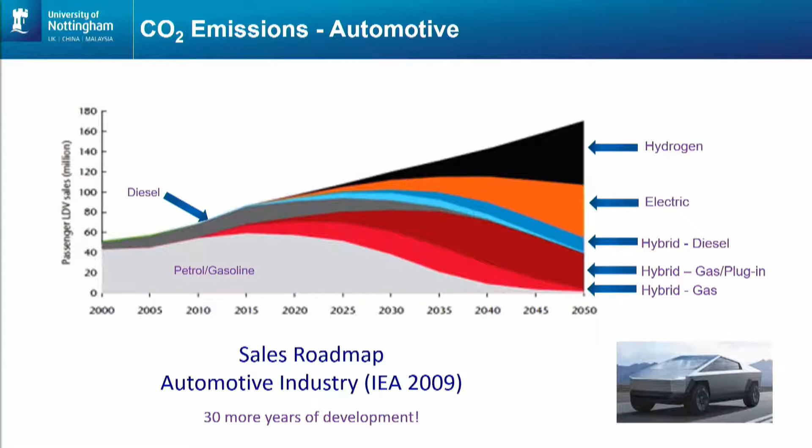They'll be replaced with things electrically driven, either as hybrids or all-electric. One thing I find fascinating about this roadmap is there's not one or two solutions as we have today — there's an energy mix, including hydrogen, but electric propulsion and all-electric propulsion will take over half of the market. I think that's important. I don't just work in automotive, I also do a lot of work in aerospace.

And they have a similar problem in trying to bring down the emissions from aviation, particularly in terms of CO2.

And they have some advantages. They can control the operations, the infrastructure, and so on. The big problem in the aviation industry is the time of investment. The aircraft going into service now will still be flying in 25, 30 years' time. And so some of this will already happen because the investment has already gone in.

So if we don't take any action, then we're going to be at twice the year 2000 levels by 2050. Obviously not acceptable. The target by 2050 in aviation is to get to half the CO2 emissions that we had 20 years ago.

We can argue whether that's enough or whether we should be going further. But the investment period in aviation is so long, it does take time to have these impacts. And the other thing to note is that some of this is known technology - we've already done this work. But over half of these gains are in new technologies and new ways ahead.

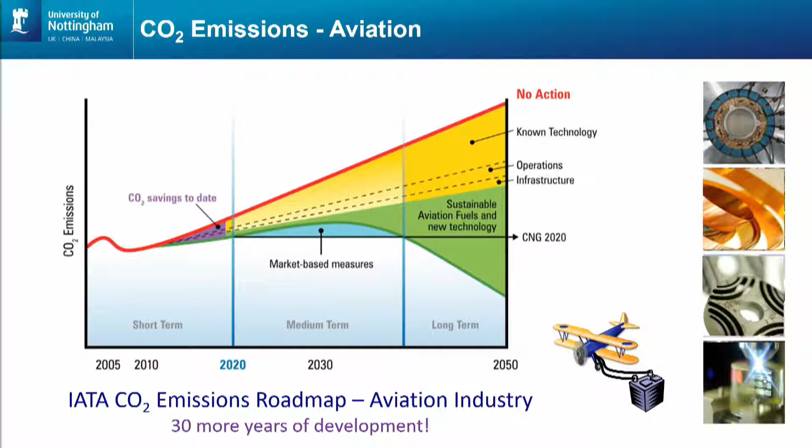So that's a quick look into the future and where a couple of industries think we might be going, and the time it takes them to get there. It's also worth looking back in the past.

We've heard a lot today about electric cars and the technologies that are available today. One thing that's worth remembering is this is not a new idea. The oldest electric car I can find relates back to 1828, almost 200 years ago. So the first cars were electric, and the peak of production was back in 1912, over 100 years ago.

So actually, the concept of the car came from the electric car, not from the internal combustion engine. The problem we find though is that by the time we got to 1928, 100 years after the first recorded electric vehicle, all production of electric vehicles had ended.

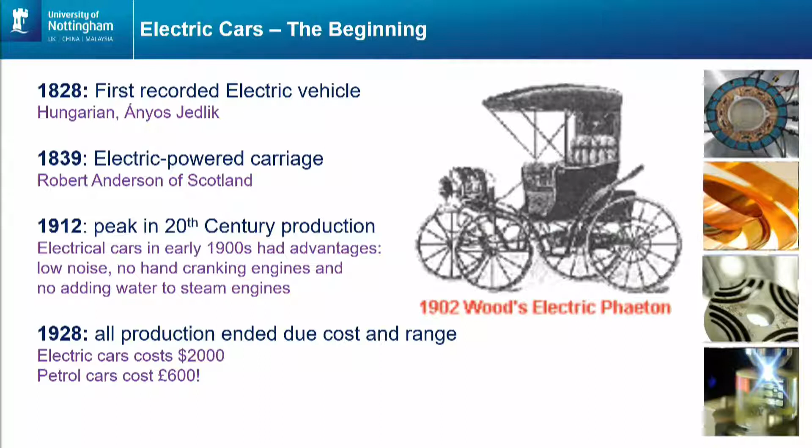And it ended for two reasons. Electric cars were more expensive and people were concerned about the range of the electric vehicle. Unfortunately, those two things are things that we've still not solved as engineers and scientists. We're still working on reducing the cost. We're still working on increasing the range of electric vehicles. We're getting there, but we still have those fundamental problems.

It's interesting to reflect on what would have happened, what would happen today, if 100 years ago engineers had solved those two problems and electric vehicles had become the cars that we know and love over the last 100 years. That decision, those market-driven influences back in the early 1920s really did have a massive impact on the world, and something that we've now got to change.

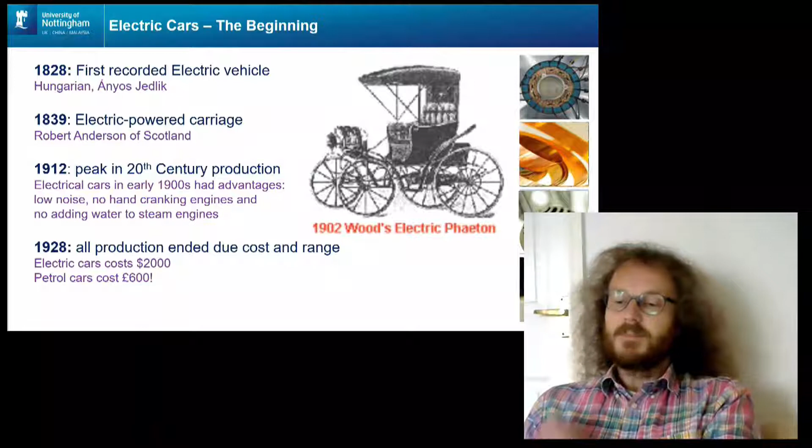So what have we been doing? Well, at Nottingham, we do a lot of development of technology. We work with a lot of different industrial partners, but we also like to demonstrate what we do and to make it exciting and accessible.

So I could talk about lots of research projects, lots of work that we do there. What I prefer to talk about is the electric superbike. It's a demonstration of the technology, but also a demonstration of advocacy of electric vehicles.

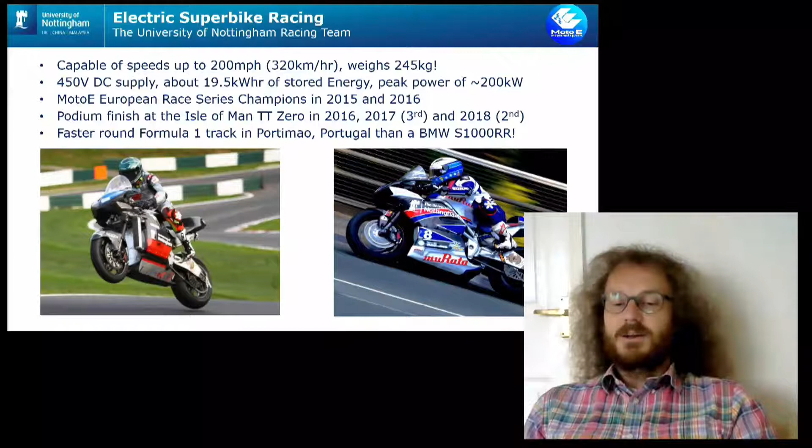So just to give you some ideas about this bike, it's capable of speeds up to 200 miles an hour. It has a peak power at the back wheel of about 200 kilowatts, so rather a lot more than your average car. It has about 19.5 kilowatt hours of stored energy, and it's faster around a Formula One track than a BMW Superbike.

So this is not a slow vehicle. This is a fast vehicle. It's for racing, and it's been designed purely for racing. Why are we doing that?

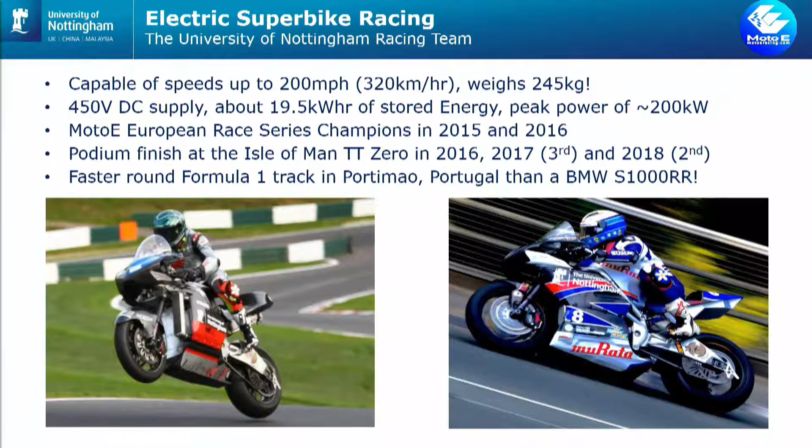Well, the first reason we're doing this is because motorsport is a great way of making technology exciting and of raising awareness of that technology. The TV and media coverage that we get from the bike has been fantastic, both for my university, but also to demonstrate how things can move forward.

Race bikes can also be used to trial and test new technologies. This bike has a lot of technologies on it that have been developed, for example, for aerospace applications. We need things that are small, light and powerful on this bike. And so it's taking those technologies that have been developed in research projects and putting them in a very testing, very harsh environment.

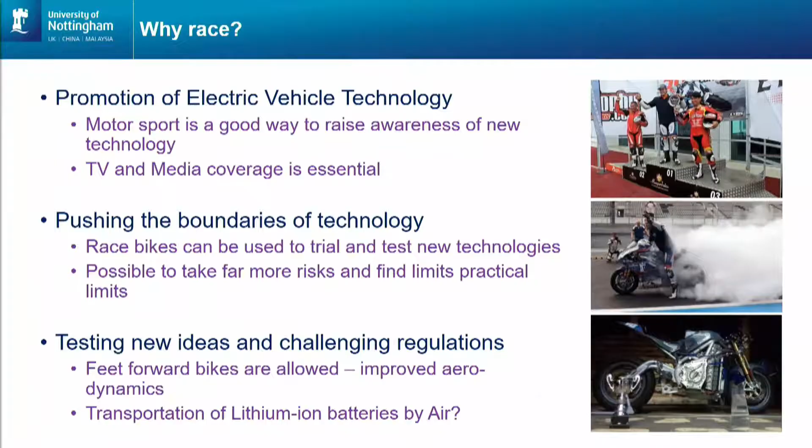When you race a motorbike, you tend to drive that motorbike to its very limits, something you tend not to do with your family car too often. So it really does allow us to take more technological risks and find the practical limits, find out what fails.

If you're racing and something fails on a bike or a car, you put it down to experience and you learn from it. It's a little bit different when you're producing millions of cars. You don't want to find those practical limits in that environment. And we're also testing and challenging new ideas.

One of our favorite races, and where this bike was designed to operate, was at the Isle of Man. Just a bit of geography: the Isle of Man is a small island between England and Northern Ireland. It sits out in the Irish Sea. It looks like it's part of the United Kingdom, but in fact it's a self-governing island. It has its own government, its own laws, and its own rules.

Every year for two weeks, they close the main roads on the island and we race motorbikes around it. This has happened for over 100 years. The route is 38 miles, about 60 kilometers long, on small country roads. It is not a normal racetrack. This is what every motorbike owner dreams of doing: testing their machine on real roads, past houses, over hills, and really racing in an environment that you would normally ride in.

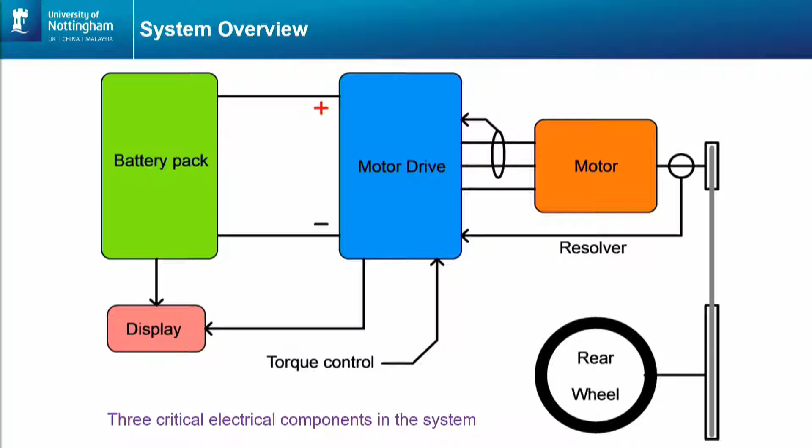If it's all electric, that would be a battery pack, exactly what we have on the motorbike. We have some power electronics - the thing that I'm professor of, that's the blue box on the screen - and we have an electric motor, the orange square on that screen. In the electric motorbike, there's no gearbox - it's a direct drive from the motor to the rear wheel, single speed sprocket.

As the previous speaker was saying, electric vehicles are really torquey. You get instant acceleration - the controller responds in microseconds to any demand. So that motor is very torquey and very capable of accelerating the bike without the use of a gearbox. No wasted time changing gears or anything like that. The bike will accelerate quite rapidly without that.

So these are the elements we're talking about. To do this and enable electric vehicles to happen - to increase the performance, increase the range, increase the efficiency - we need to look at these elements: the battery, the energy storage, the motor drive, the power converter, and the electrical machine itself, and get the performance of these that we need.

This is great in racing because we're being pushed by our competitors all the time, but it's those technological developments that then go into everyday electric vehicles, maybe scaled down a bit, maybe in larger vehicles. The sorts of powers we're talking about here might be what you'd need in a truck on a normal road. So a great way to demonstrate that technology and get the efficiencies up, get the range up, and so on.

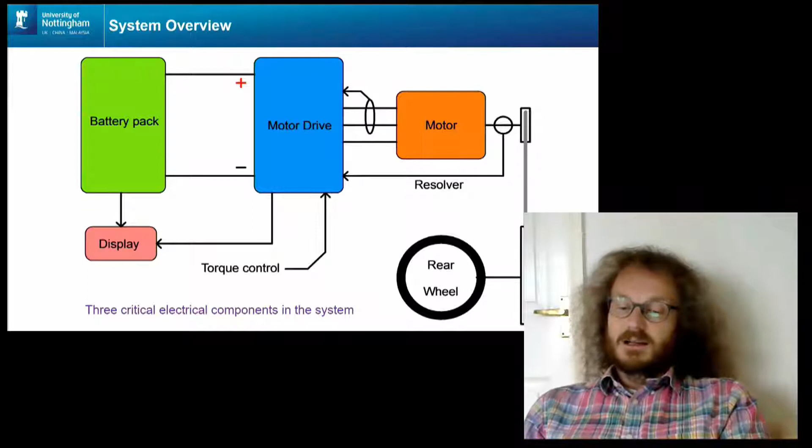So when we're looking at this, we've done a lot of work on the electrical motors themselves - how to make those smaller, lighter, how to use new technologies coming along in terms of integration, magnetic components, all the great things that professors like to spend a lot of time working on, and where we do a lot of our research to try and improve these machines.

Now, what you can't do for an electric vehicle is go and buy an off-the-shelf motor that's been designed for a different application and use that in the electric vehicle application. What you need to do is design and build your electrical motor around the use cases that vehicle would expect to see.

In the electric superbike, this is really easy. We know how a number of riders will ride our bike around that track, around the Isle of Man TT course. We know that's how they're going to ride the bike, we know what the duty cycles look like, we know exactly what that use case is all about. So we can define that really well and optimize the electrical machine just for that race. Now, that's a little bit harder when it comes to cars for everybody else, or trucks.

There's a range of use cases. We don't all use cars in the same way. A taxi is driven in different duty cycles to, say, somebody who uses their car to tow trailers and drive across the country. But we can take those ranges and optimize the electrical machines and the drives around that.

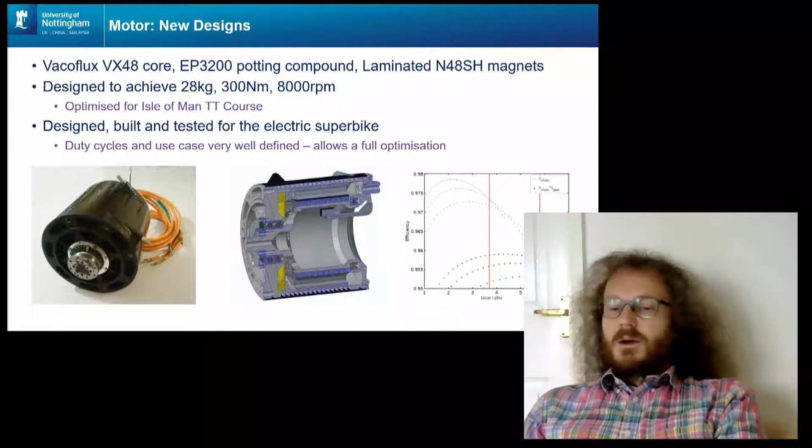We need to be able to control that electrical motor, and this is the big step forward that they didn't have in the 1920s. So when they first had electrical cars, they didn't have controllers to control the electrical motors using power electronics in the way we do today.

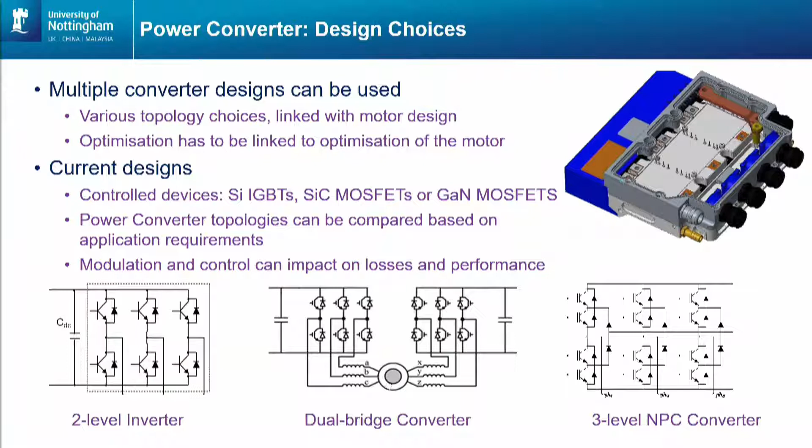There isn't just one design of power electronic converter you would use in this application. There's lots of different designs, lots of different topologies of those power electronic converters, lots of different materials that are emerging that we can use for the switching devices we need in those power converters. And they have some great advantages that we can use.

So here is just showing the efficiency gains that we're having by going from silicon-based switching devices to silicon carbide-based switching devices. Devices that were just not available 10 years ago, but now are allowing us to get massive increases in the efficiency. Why is that important?

Well, that reduces the losses in the vehicle, so you don't have to take quite so much energy from the grid. You can drive your vehicle a little bit further for every full charge of battery that you put in there. So all those things work really well and are pushing towards removing the problems of range, reducing the problems of how long it takes to charge the vehicle, reducing the weight of the vehicle.

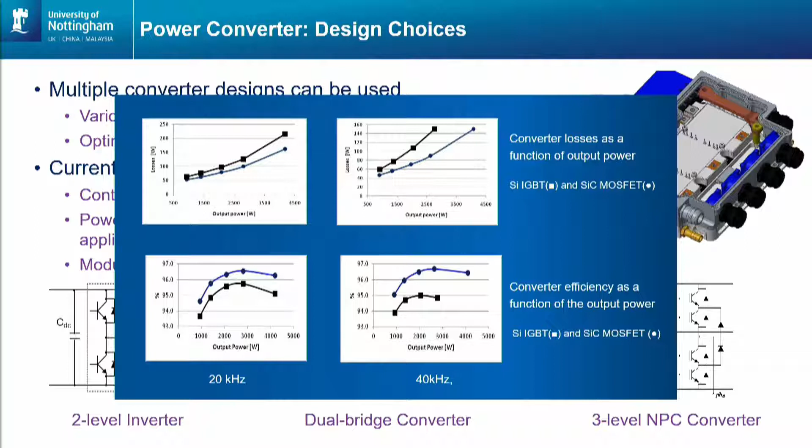And the amount of energy you waste in driving. So a good example there of where at the very small level, these devices are only 2 or 3 millimeters square, but where that technology in the switching devices is helping us to develop the power electronic converters we need to enable more practical electric vehicles. All very important in terms of moving forward.

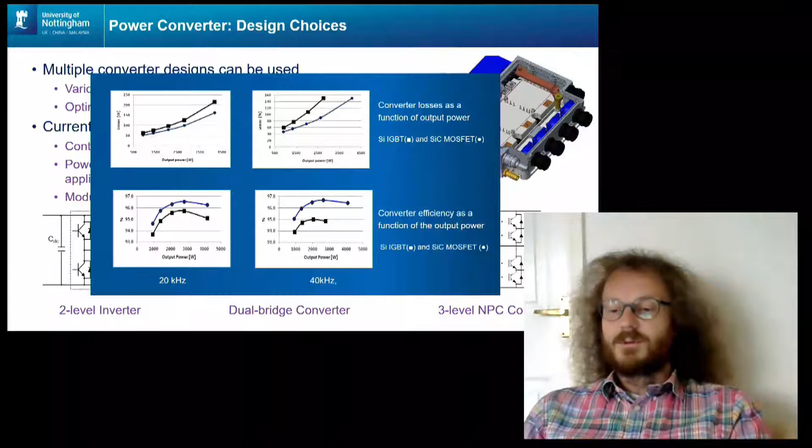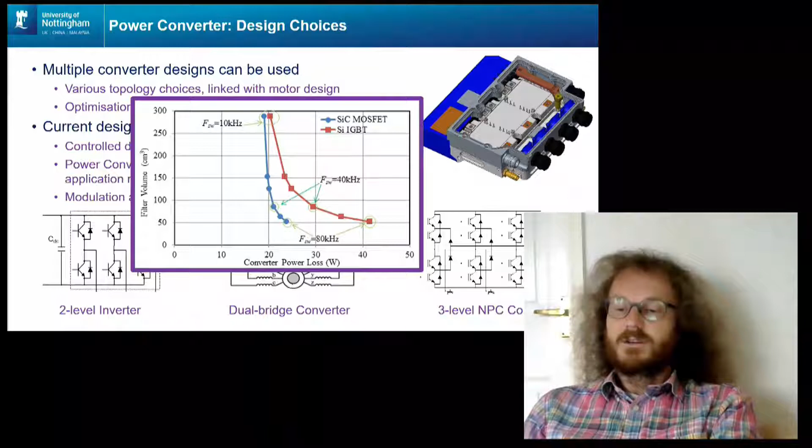So that's the electrical machine and the power electronics. The other problem we have is with energy storage.

Gasoline, petrol, or diesel are both very good in terms of the weight and volume to the amount of energy you have. And they also, in a vehicle, have the interesting effect of reducing the weight of the vehicle as you drive. With a battery, the battery stays almost exactly the same weight for the entire journey. It doesn't matter about its state of charge. The battery will always weigh the same.

This is interesting for the motorbike because it means the dynamics of the motorbike are constant throughout a race, something our rider noticed quite quickly.

What we're waiting for here, I guess, is that at the moment we are reliant on lithium-based batteries. They give us the best volumetric and gravimetric energy densities, so they give us the lightest, smallest solutions we can use today. If you look at the history of rechargeable batteries, we find the chemistry keeps changing.

We still have lead acid batteries in our cars for the 12 or 24 volt systems that run the auxiliaries on our everyday cars today. But it's quite an old technology, and most of us will probably remember going through NiCad batteries, nickel metal hydride rechargeable batteries, and then the lithium-based technology came along.

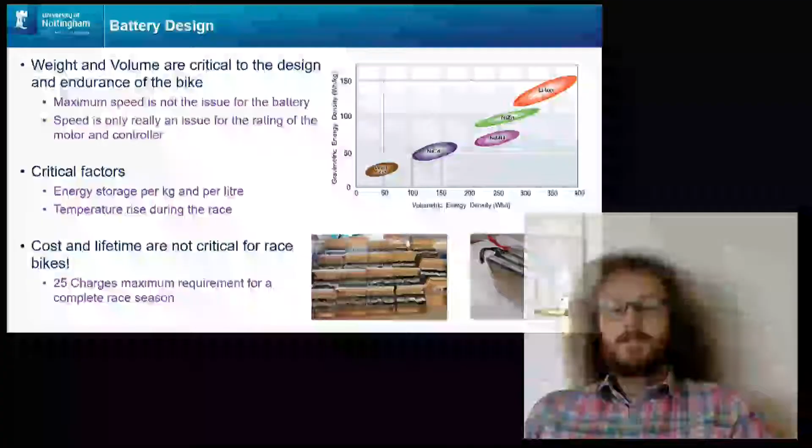You'll be plugging in your telephone once a week to charge it rather than once a day. And the whole problem with the range of electric vehicles will go away, because the weight and the size of the battery we need will be at the point where it's no longer something that's an issue. So that'll be great to see, that battery getting smaller, that battery getting lighter.

It's practical today. The previous speaker was mentioning the Rivian trucks with a range of 500 miles.

I don't know about anybody else, but I need a cup of tea or coffee before I drive much further than that. But there's still that anxiety there, still the cost factor there. Hopefully what we'll see is another chemistry coming along and that disappearing in time.

So lithium-based batteries make electric vehicles feasible. The next chemistry will hopefully make them irresistible to everyone in terms of what we're doing.

Just to explain the last bullet point on this slide, when we're racing electric motorbikes, we don't care about the lifetime of the battery pack, and to a certain extent we don't care about the cost. We're looking to win races, and if you're looking to win races, you need to push the technology as hard as you can. So it's been a great way to test battery technology to the very limit.

So what have we learned from racing electric superbikes? Well, we've learned that racing is a great way to enthuse people and generate impact from the technology, to demonstrate that technology. We've discovered that electric racing is still possible to compete at the highest level, even though we're a very small race team, but we do have all this research background we can bring into play.

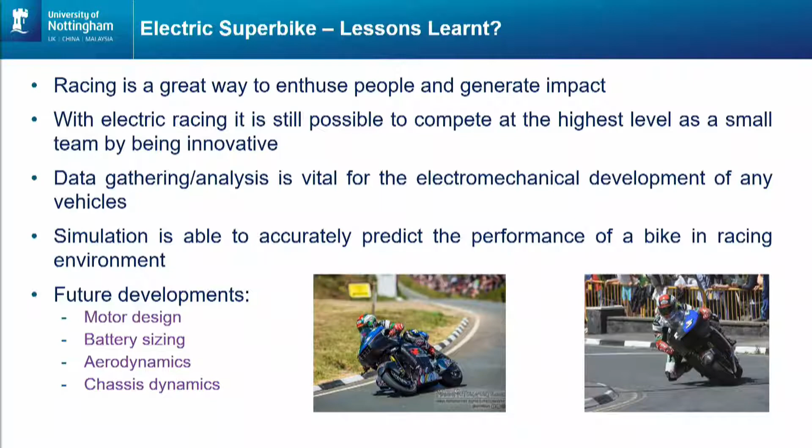So as the previous speaker was saying, part of the electrification revolution is going to be about the advocacy, about government intervention, and about doing the right thing for the planet. It's not all going to be about cost, and how we've got to change the way people feel.

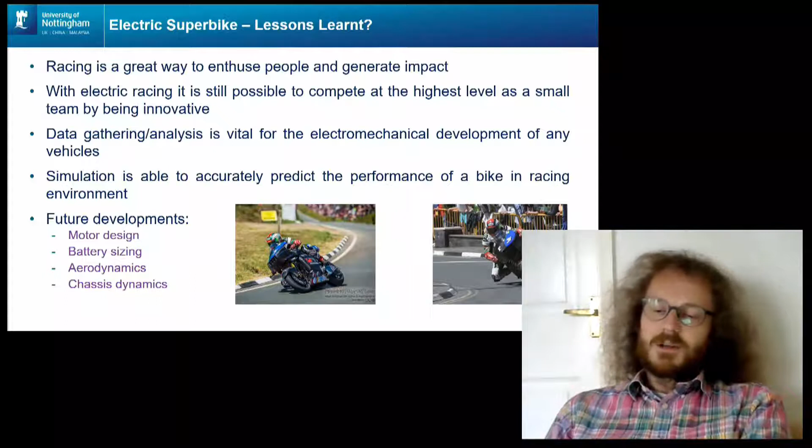Now, we do a lot of work at Nottingham in aerospace. I'm not going to go into that, but just to say that as well as demonstrating road transport, we also do a lot of work in demonstrating what will happen in aviation. It's always good to have an equivalent of the motorbike, but for flying. And we don't just race motorbikes, we're also developing the electrical systems to allow aircraft to race.

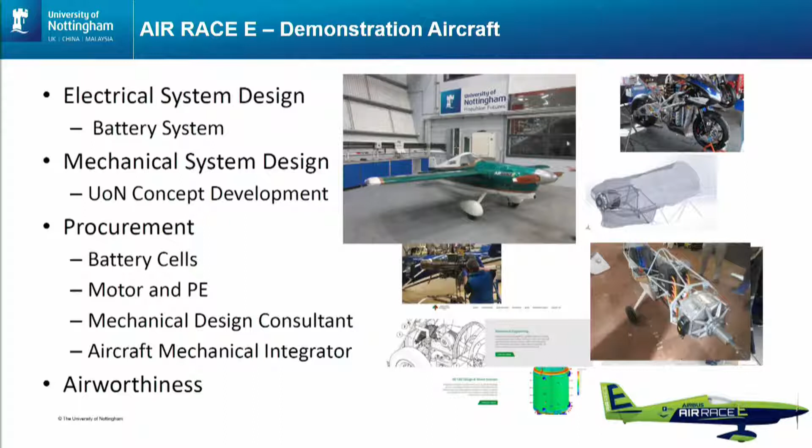So this green aeroplane you see in our lab, in that photograph, is a small race aircraft. It used to race in Air Race, which is the Formula One of single-seater aircraft, racing around pylons, either tip-to-tip or time trialing. We've taken the electrical system concepts from the motorbike and installed those into that aircraft, so it will be able to fly and race with an electrical motor and power system. We're doing that to get through some of the problems, develop some of the ideas and technologies needed, and demonstrate those on a small scale, yes, but in an exciting aircraft format.

And alongside that, of course, is all the work we're doing on trying to take that technology and apply it in regional and large civil aircraft over the next 20 to 30 years as this technology develops.

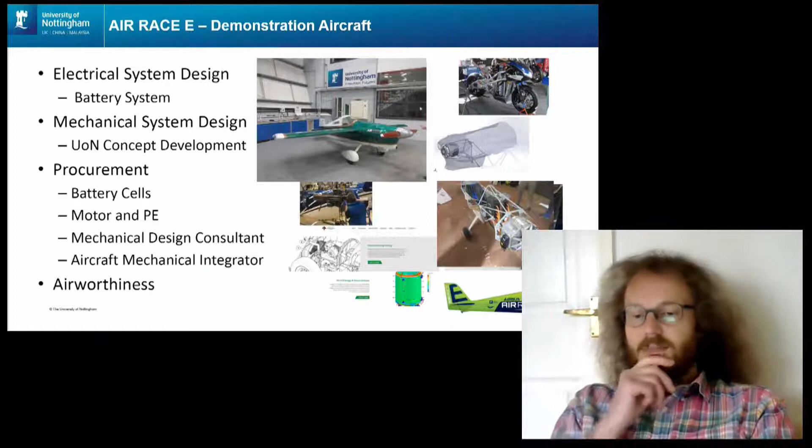So my conclusions from all of this is really to say that electrification of transportation is happening today. We need to continue that technological development as the rollout of electric vehicles, planes, trucks, and cars continues. Power electronics and electrical machines are a key technology to enable that to happen. They have to be efficient, light, and have a reduced cost, but also the energy storage systems, the batteries, do need to improve if we're going to increase the range and reduce the purchase costs.

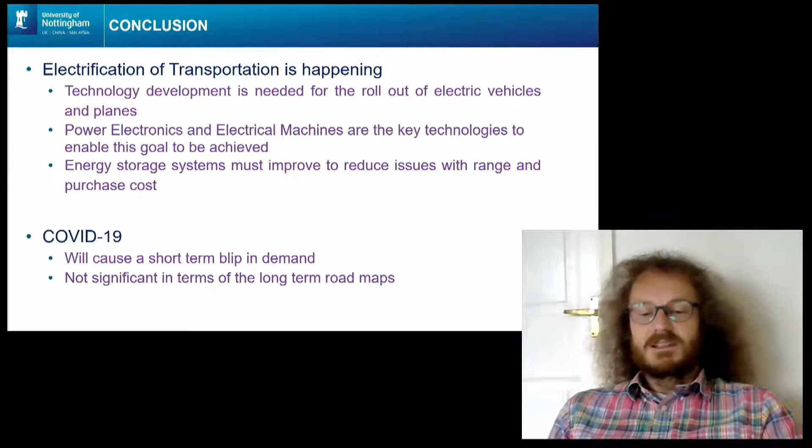And finally, because it's topical, COVID-19 has caused a blip in demand, as we heard about earlier. But in terms of the roadmaps we're looking at here, it's shown what is possible in terms of emissions, but it's not significant in affecting this move to electrification.

Back to you, Rob. Fantastic, Pat. It's really exciting to hear that you've simplified, I think, a very complex system for everyone so that the layman on the street can understand. And I'm really excited to see this video of the Isle of Man TT. I think for any rider to get on board an electric rocket around the Isle of Man takes quite a lot of guts and courage. So I'm excited to see what the video you got to share with us. Yeah.